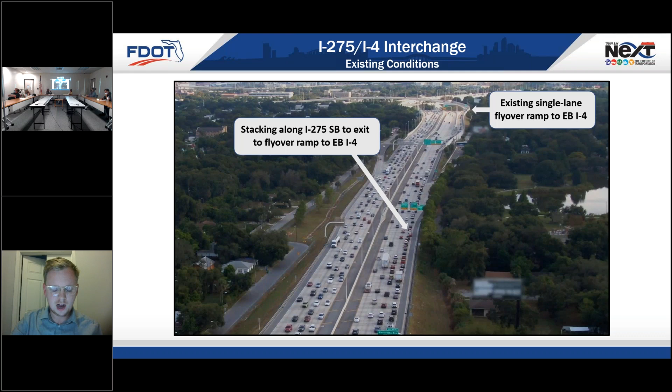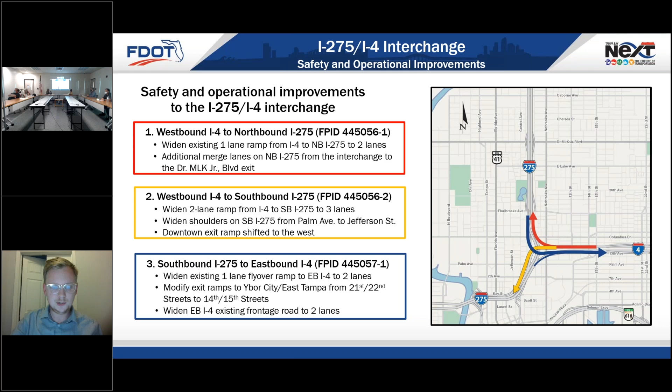There are 3 proposed changes to alleviate these problems: the red being westbound I-4 to northbound I-275, the yellow being westbound I-4 to southbound I-275, and the blue being southbound I-275 to eastbound I-4.

These quick fix safety and operational adjustments will reduce the previously stated lane weaving and speeding, reduce congestion in lining up with the I-4 exit, and improve access to the local exits.

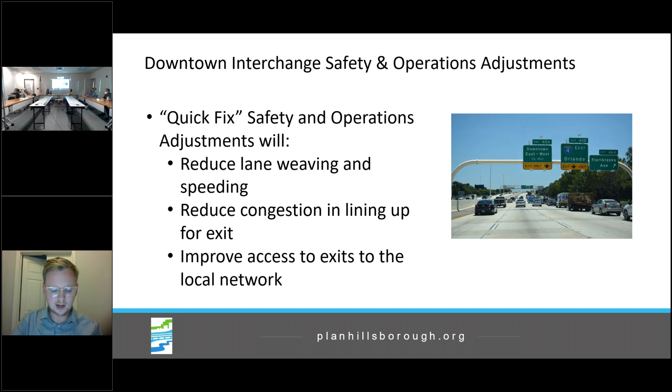FDOT is measuring that the downtown interchange will reduce deaths and serious injuries on I-275 near I-4 by nearly half. This means the downtown interchange could prevent 1 to 2 fatal crashes and roughly 220 injury crashes annually. Since there are roughly 200 fatalities in Hillsborough County annually, this could mean a 1% drop in that measure.

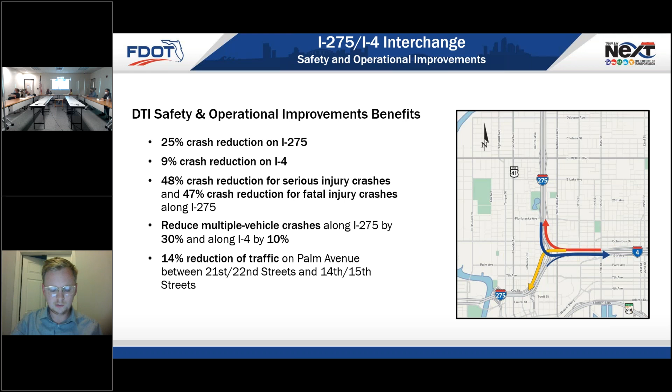FDOT is also measuring a 14% traffic reduction on local streets. Continuing on that topic of traffic congestion on local streets, the downtown interchange is also planned to improve connectivity and safety on the local street network below.

There's a proposed trail system that will connect the Green Spine project to Ybor and Encore development. Further, these improvements will complete streets under the interstate to connect these communities.

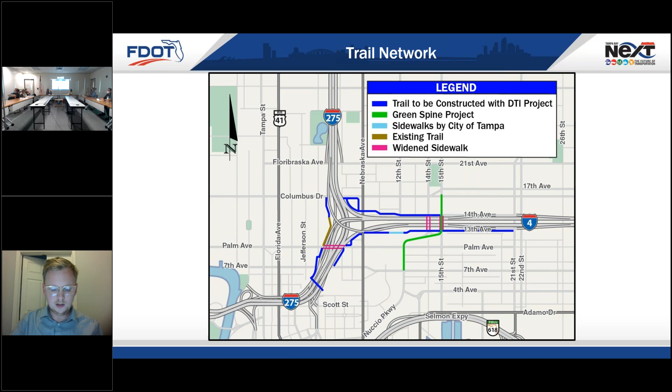The TIP amendments are also intended to relieve some issues on the local network, like drivers driving too fast on and off the interstate ramps, and difficulty seeing at night. Some mitigation strategies include reduced lane widths and high emphasis on crosswalk markings.

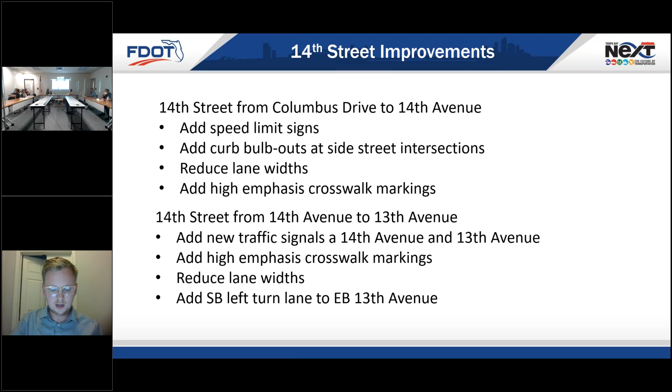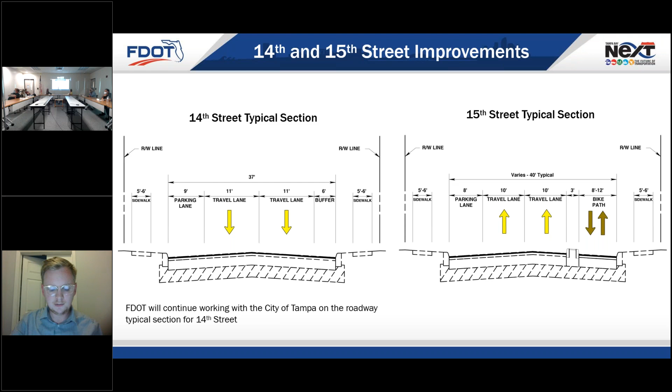This slide shows the typical street sections for 14th and 15th Streets. While FDOT is responsible for the work on 14th Street, the City of Tampa has plans to improve 15th Street through the Green Spine project. These changes include sidewalks moving from 5 to 6 feet and lanes being narrowed.

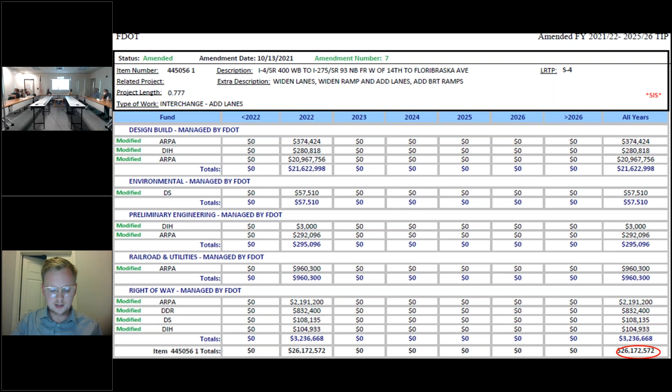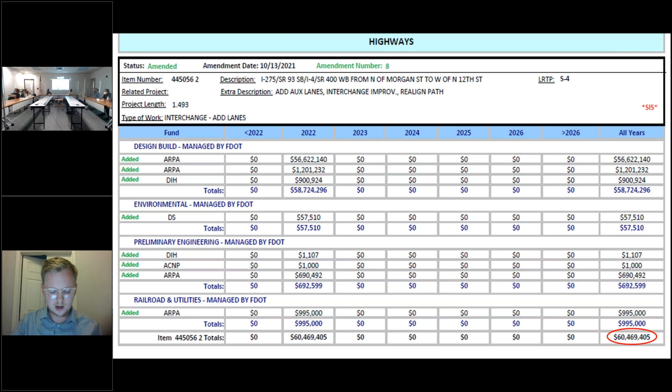The next amendment is an additional 60 million for westbound I-4 to southbound I-275. The third amendment in this set, in the downtown interchange project, is adding 66 million for the I-275 southbound off-ramp to I-4. These 3 amendments make up roughly 154 million.

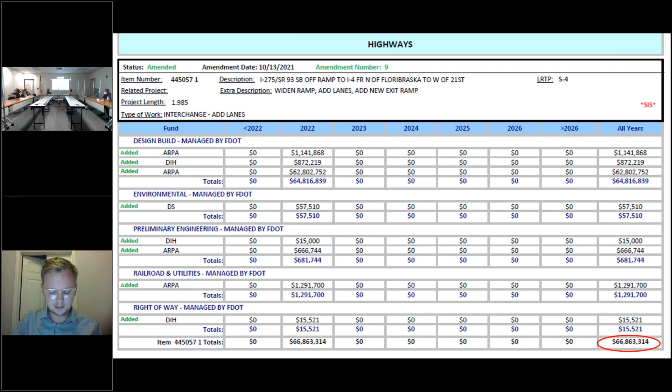The next group of projects is the Westshore Interchange Reconstruction preliminary phase. These 5 projects are preliminary projects that make up 1 out of 4 phases of the Westshore Interchange. The Westshore Interchange has been a top regional priority for many years, and these projects aim to reduce congestion and weaving at the intersection of State Road 60 and I-275. They will also complement the Howard Frankland Bridge reconstruction.

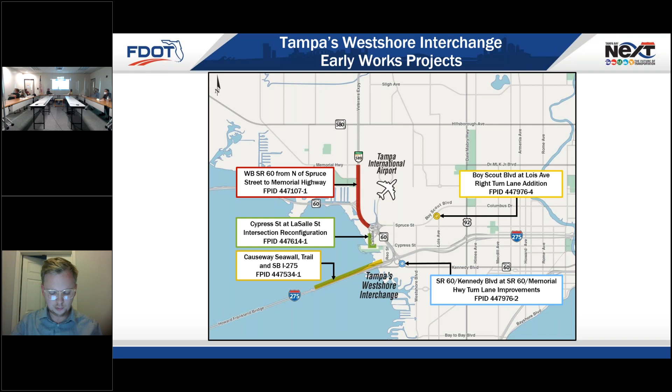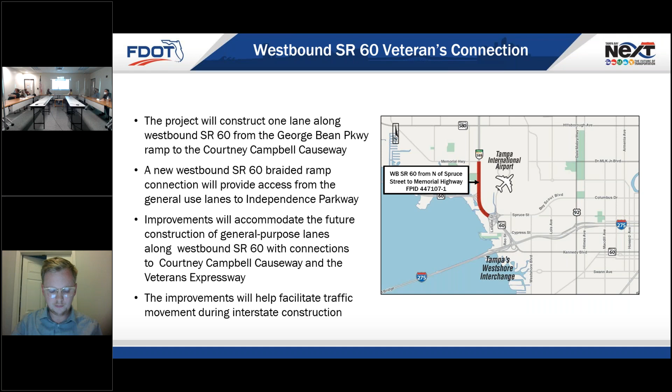The first project, westbound State Road 60, will construct 1 general purpose lane, not a toll lane, along westbound State Road 60 from the George Bean Parkway to Courtney Campbell Causeway. The project has a total of around 36 million for utilities, preliminary engineering, environmental care, and the design build.

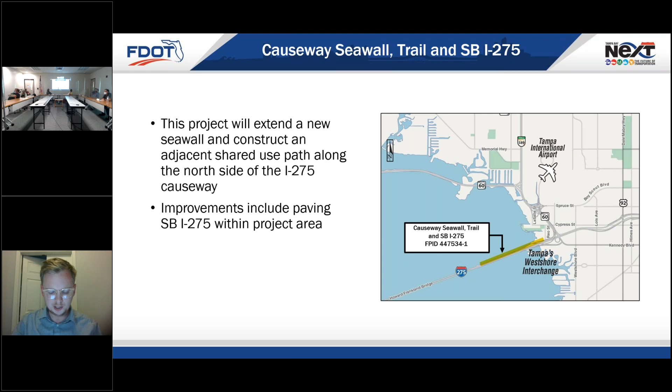The next project will extend a new seawall and construct an adjacent shared use path along the north side of the I-275 causeway. This project has a total of nearly $37 million.

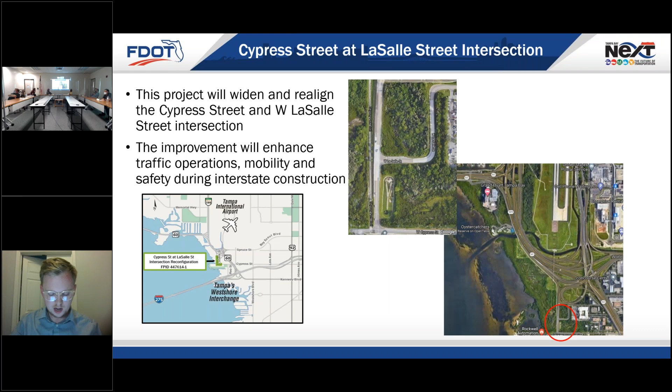The next project is Cypress and LaSalle Street. These 2 low-volume roads are near business parks. They will be widened to enhance connectivity to 2 off-ramps and 1 on-ramp to the West Shore Tampa International Interchange. The project cost is around $3.6 million.

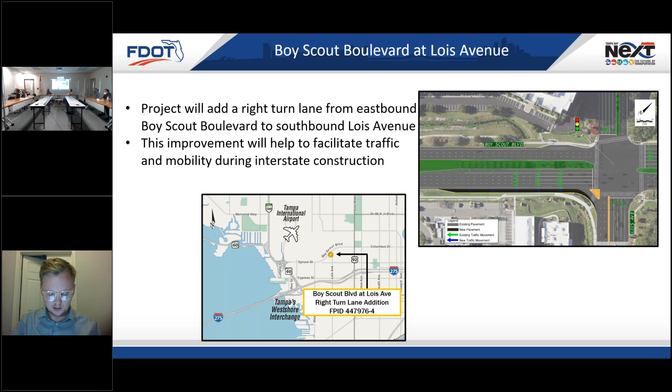The final West Shore Interchange Amendment is a project to add a right turn lane from eastbound Boy Scout Boulevard to southbound Lois Avenue. This project has a total of around $527,000.

Finally, the Integrated Corridor Management, or Traffic Congestion Management technology, will allow a traffic control management center to manage congestion among several key corridors. These corridors include Nebraska Avenue, Tampa Street or Florida Avenue, Hillsborough Avenue, Dr. MLK Jr. Boulevard, Boy Scout Boulevard, and Kennedy Boulevard.

These systems include advanced detection monitoring systems, dynamic message signs, and closed circuit television. They have the goal of making roads safer and improving travel time reliability. Ultimately, they will deploy technology to allow engineers to see what's happening with traffic in real time.

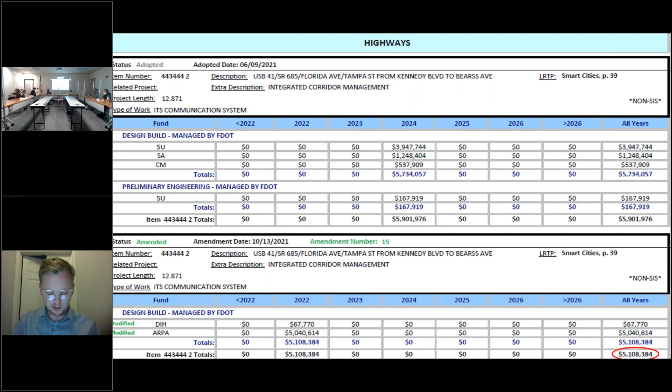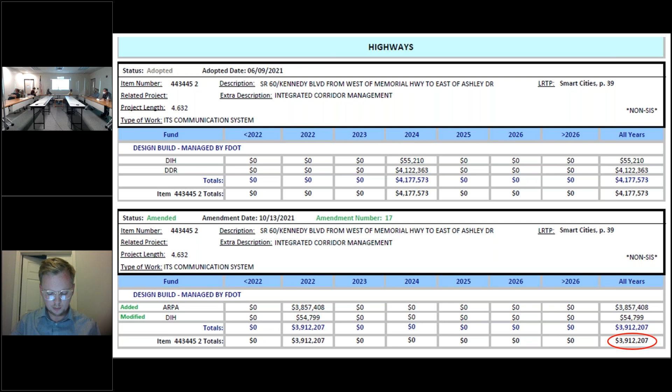The first of these amendments is roughly $5 million for design and build of Florida Avenue or Tampa Street. The next is roughly $6 million for Nebraska Avenue from Kennedy Boulevard to Bears Avenue. The third amendment is to change funds for roughly $4 million for design build of ITS systems on Kennedy Boulevard from West Memorial Highway to Ashley Drive.

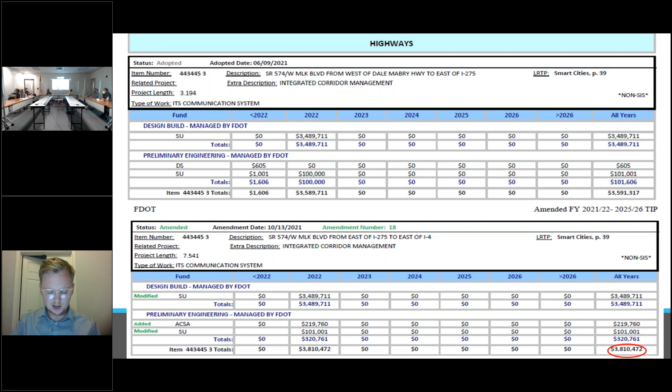The fourth is Amendment 18 for funding, including $3.8 million of ITS systems on Dr. MLK. The fifth is $3.3 million for ITS systems on Hillsborough Avenue. Finally, the sixth ICM project, Amendment number 20, is $1.6 million for ITS systems on Boy Scout Boulevard from Airport Service Road to Dale Mabry Highway.

As part of our public participation pilot, we're aiming to ensure that the public has had the opportunity to voice their concerns and support before they come before the committees and board.

One of our outreach projects came from the Long Range Transportation Plan Outreach Survey that received over 5,200 responses. Respondents were given 4 options regarding a downtown interchange reconstruction. While the no-build score was higher in downtown areas and the full rebuild rating was higher in ex-urban areas, the safety and traffic quick fix option had the highest star rating overall and was supported or unopposed by most zip codes.

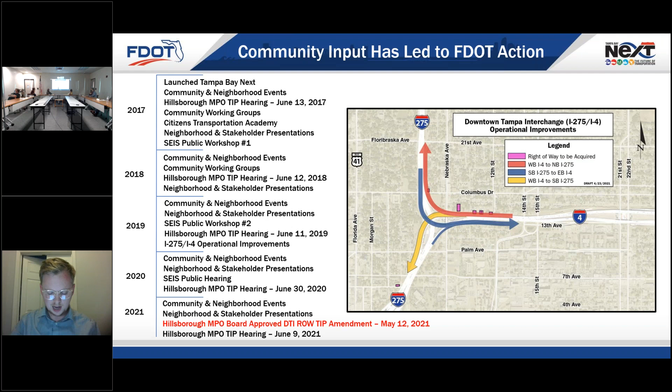As part of the pilot, we also asked jurisdictions what public outreach they have done. FDOT in this case has done significant outreach regarding the downtown interchange since 2017.

This has involved a series of community and neighborhood events, community working groups, and neighborhood and stakeholder presentations. As part of the pilot outreach, the TPO has also done significant outreach for these projects, including a press release to 30 media outlets and more than 100 neighborhood associations and community groups. There's also social media outreach, signs posted, and a webpage for more information.

There have been some clerical corrections since the beginning of these presentations. This involved the description of the first West Shore Interchange project changing from 1 express lane to 1 general purpose lane. There are no toll lanes in these amendments. These changes have also included a correction from left to right turn lane from eastbound Kennedy to eastbound Kennedy. Finally, the project limits for the Hillsborough Avenue ICM project has changed from I-275 to Veterans Expressway.

This slide shows the TAC and CAC suggestions. These include leading pedestrian intervals at intersections with additional turn lanes, accommodating cyclists riding to Cypress Point Park and Courtney Campbell Causeway, noise walls at Robles Park, landscaping at those noise walls, and narrow lanes and wider sidewalks on 14th Street.

In coordination with the City of Tampa, traffic signal prioritization for buses on the ICM corridors with coordination with HART, to ensure that new fences do not impede walk and bike access opportunities, and to refer to the downtown interchange as part of the high injury network rather than as a Vision Zero corridor.

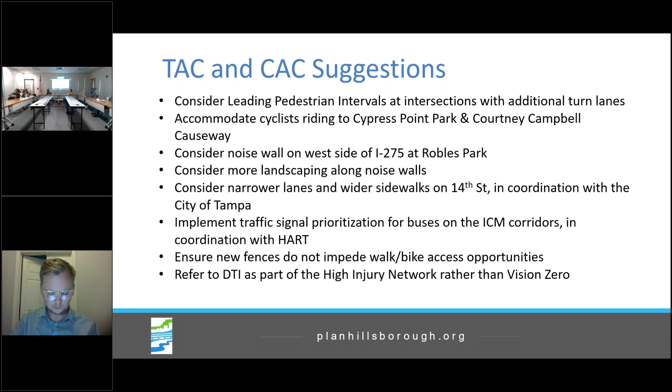I'd also like to provide Mary Lou Godfrey's information from FDOT. She's a project manager for the Tampa Bay Next project, along with my contact information as well. Today, the TPO board voted to approve the amendments.

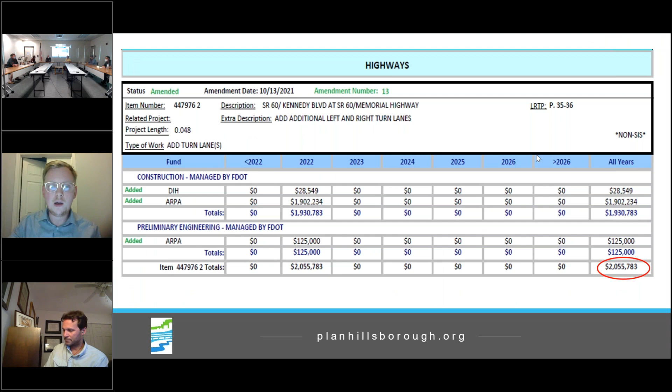I do have Mary Lou Godfrey on the line. She may be able to answer that question better than I, but I'll go back to the slide. The proposed changes are a third right turn lane from Kennedy to Kennedy, and a left turn lane from Kennedy to Kennedy. The TPO did make a motion to include recommendations from the TAC and CAC, which include leading pedestrian intervals at intersections with additional turn lanes. However, I'll refer to Mary Lou Godfrey to see if she has anything to add.

Yes, these plans are currently in design, and those pedestrian and bicycle accommodations are being reviewed. So we are still in the design process, but we can provide you updated plans if you would like, for better clarification of the pedestrian and bicyclist accommodations.

Yeah, because I believe Kennedy Boulevard has transit stops. It's a transit corridor, is that correct? And so you're going to have pedestrian activity there. Is there pedestrian refuges being considered, or mid-block crosswalks? Also, is this part of the alignment of the bicycle network?

So is there, based on the land uses, destinations that micromobility users are currently accessing and want to continue to access, even though we're making the intersection larger with more left turn lanes that create larger crossing distances? That's the kind of information I'd be interested in.

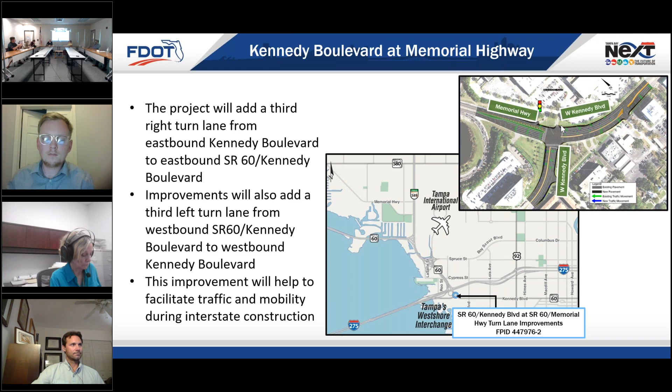Go ahead, Miranda. So that the signal, you don't have to wait so long, or I'm just trying to understand.

Well, because there's typically loops in the road that detect the cars, but the industry is moving towards cameras and infrared, which will be able to detect pedestrians and bicyclists as well, to allow them to commute and travel efficiently by being recognized by the traffic signal.

Will the technology be upgraded at this location, and will it detect pedestrians and bikes? Like I said, we're currently in the design, but we'll certainly incorporate the pedestrian detection. I don't know the exact amount of technology that we currently aren't using that would be added, but I could certainly find out for you.

Now, for that ITS, does that include on and off ramps that you guys will be improving? It's currently on what we consider our arterials, so it's not included on the on and off ramps at this time.

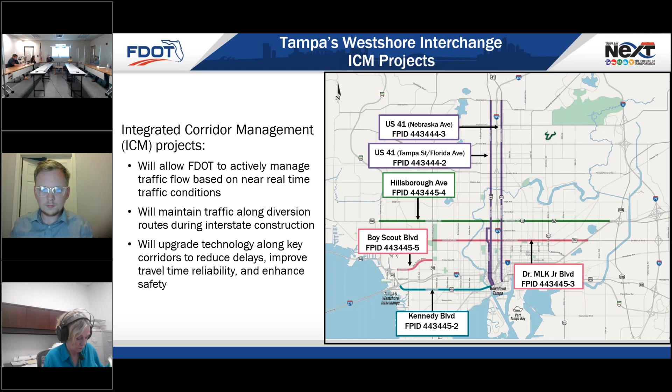Okay, so arterials. So how will this ITS improve walking and biking efficiency and safety? Currently, the integrated corridor management looks mostly at, it does have the ability to see the density of traffic, so that it can be gauged on which routes people can take if there seems to be congestion.

So, in an indirect way, that could help pedestrians not to have roads that have extensive volumes on them, just disperse the traffic, reduce the delays, increase safety.

Okay, because that travel time, is that like delivered to your Google Maps and your Waze and? Yes, through those data platforms, yes.

So then a pedestrian who wants a walking route would also get delay time, is that right? Like red time versus, or is it just, yeah, with that system, also provide them with red and green and walking routes instead of a time based on their walking rate.

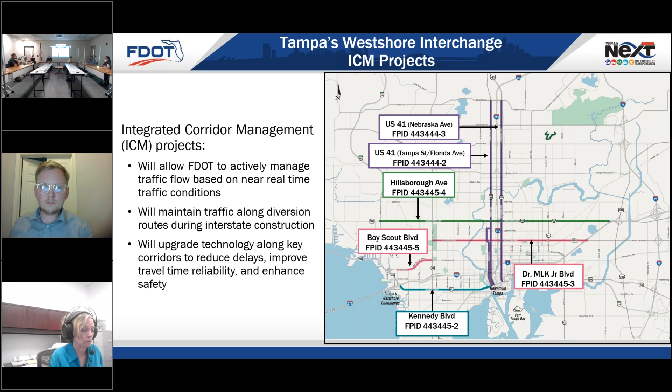I'm not sure, I could find out for you. Are you asking for specific technology to be incorporated? Because typically they would just do a standard crosswalk, add LPI, and make sure it's all at the standard and everything.

But are you guys? Yeah, because this technology is providing travel times to drivers, right? When they look up directions and stuff and. Well, there will be like a crosswalk button, so when you hit the button, then it'll flip the signal and it'll give you the walk sign.

But so my understanding is when these drivers are traveling, they're provided with reliable travel times. Is that right, Barry? Yes, and it feeds it to many of the applications like Waze, or if perhaps there's some kind of issue or incident on one of the arterials, it may recommend a different route.

And we do have, if it so happens maybe there's an incident on the interstate, and based on the data that's from the integrated corridor, it's determined that there's an alternate route. Sometimes that can be used to allow drivers to improve their travel time.

If I may, is the question, Abigail, is this technology going to be transferable to any pedestrian or bicyclist use of tracking, mapping, or route direction kind of applications? I think that's the question in the comments.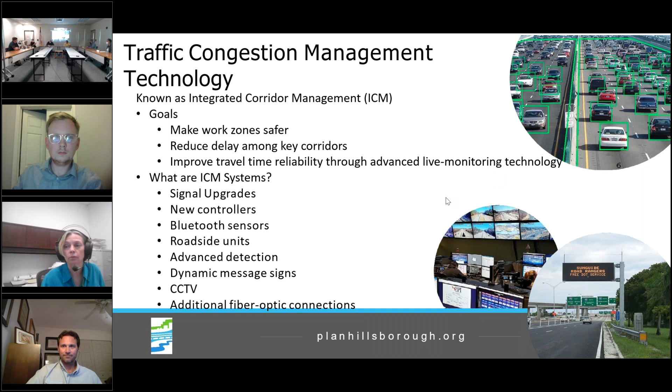I talked about, okay, we want to make a shared use path connection from the project up to Cypress Point Park, and Mary Lou said that they're going to be doing that through Rio Street, an 11-foot shared use path running adjacent to Rio Street. And then also, I think the other area of opportunity is making the connection from Rio to the West Shore Interchange Mall, as that's a big regional destination. I think that shared use path connection should be made there.

But I know that this project, as it currently stands, does not have that shared use path connection. And considering that they're going to be doing some heavy construction on Kennedy and State Road 60, my motion is that we recommend the addition of a shared use path connection between Rio Street and State Road 60 to the West Shore Mall.

What do you guys think of that? I would second that. You would second that?

Okay, so we have a motion and a second, so it's time for commentary. So the motion again, Tim, is to recommend a shared use path along Rio Street, along Kennedy Boulevard, connecting the existing shared use path that will be present at Rio Street to the West Shore Mall, ideally along the north side of Kennedy Boulevard, but obviously where the right of way permits.

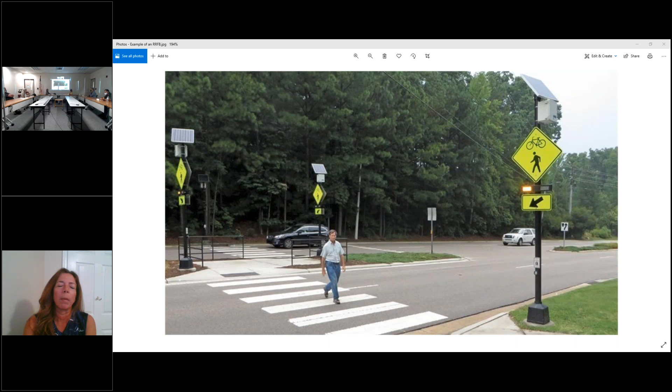So there's regional support, and that was shown in the attached letter to your item, but it was from the Suncoast Transportation Planning Alliance, which used to be TBARTA. There's 5 MPO and TPOs on that group, as well as several cities, and even the Institute of Transportation Engineers have signed on in their opposition to these laws, the 2 bills, I should say. And we just like to get support from our committees.

We also will be sending a letter very similar to this letter to our legislative delegation and have that distributed out, and really are encouraging other agencies and organizations to chime in, because I guess we've heard from some legislators that if you inundate them with letters, it kind of gets their attention. So that's it. I can maybe answer some questions. Abigail's there if there's some technical questions, but just wanted to hear your thoughts on that letter.

And I'll open up the floor concerning any questions. Yes, Val. Is that what's on Bay Shore now? There's several of them on Bay Shore now, which has helped with safety on Bay Shore Boulevard. That's Bay Shore Boulevard has them, East Hillsborough Avenue, Fletcher Avenue. You go back to.

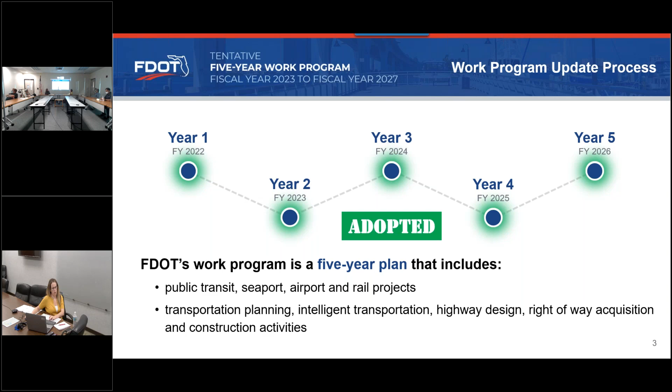So each year on June 30th, the current year of the work program ends. And on July 1st, year 2 moves up to be the new current year.

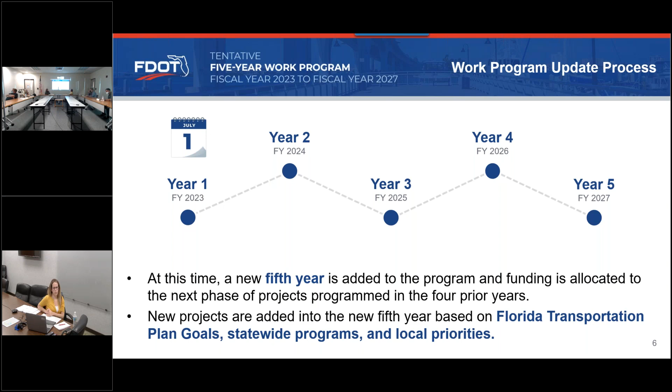This is just showing that come July 2022, we're going to be in fiscal year 23, and our new 5-year program is going to extend all the way into 2027. So new projects discussed tonight are going to be any projects that have been added to the new 5th year, fiscal year 2027. These projects are based on Florida Transportation Plan goals, statewide programs, and local priorities.

Currently, we are in the process of updating the work program, so we're in the tentative stage. It's really a proposed work program at this point. We are going to submit it to the Florida legislature later this year for review, and then it goes to the governor for review and signature. After the governor signs the work program and is good with everything, the first year will be included in the state budget, and the work program is considered adopted at that time.

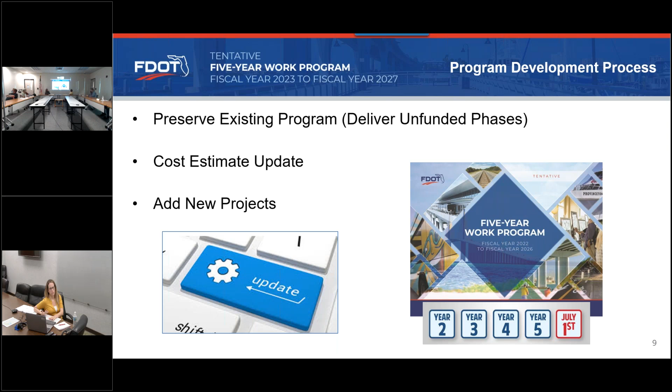Basically, when we're deciding what projects are going to be funded, we first look to preserve existing programs. So we look to see if we have any projects with phases that are not currently funded first. Then we look at the cost estimates of projects that are currently funded, so any estimates that need to be updated, we program and fund those. And then we look at adding new projects in the new 5th year. Sorry, confusing.

Projects that we would look to fund would be safety and security. We want to preserve the system, multimodal enhancements, operational improvements, capacity improvements. All of these projects are based on the MPO's priority list, regional priorities, the SIS, and FDOT priorities as well.

So basically, in my presentation, if you don't hear me bring up a project, it's nothing new, it's still programmed, nothing has changed. Generally speaking, everything I'm about to give you the highlights for Hillsborough County is basically anything that's been added to fiscal year 2027, and it could be anything from PD&E phase, design, right-of-way, construction, design build, or capital grant.

So the first project is the MPO transportation planning, which is the #1 priority for the TPO. They get this every year. We've added their planning studies to do whatever planning studies they need to perform in fiscal year 2027.

The second one is George Road from Dana Shores to Town and Country Greenway. It looks like we had it programmed for design in fiscal year 24. However, we went ahead and added a planning study, a corridor study, in fiscal year 2025 at the request of the MPO. And the last one on this particular slide is Fowler Avenue from 56 to I-75. We added a corridor study in fiscal year 23 to really look at the bike-ped improvements that need to be done in this part of the corridor.

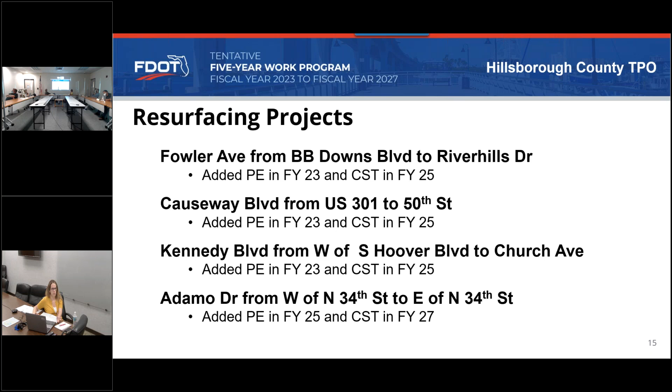This one looks a little different, so let me hold on one second. The department actually funds resurfacing projects in the new third year of the work program, so that's why some of the funding isn't showing in 27 — it's actually a bit further in. So that works for everybody.

The last set of resurfacing projects actually include intersection improvements, so we put them all on one slide. All of these projects are being funded for design in fiscal year 23, with construction in 25. The first is State Road 60 from Buckingham Place to Lithia Pinecrest Road. The next is North Park Road from Baker Street to I-4. And the last is Dale Mabry Highway from Gandy Boulevard to Sevilla Street.

The next slide covers upcoming rail projects that were added. We added rail safety construction in fiscal year 23 for State Road 60 rail crossing 624572-B, east of Clarence Gordon Drive or Junior Road. We've also advanced rail safety construction from fiscal year 25 to 23 for the Kennedy Boulevard at Willow Avenue Railroad Crossing.

Our last set of slides on Hillsborough County highlights is on multimodal projects. TIA is getting construction in fiscal year 23 for the replacement of their airside shuttle cars and systems. Then HART bus replacements, another TPO priority — I think it's number 3 — they receive funding every year, usually in the form of a capital grant for bus replacements, and they'll be receiving that funding in fiscal year 27.

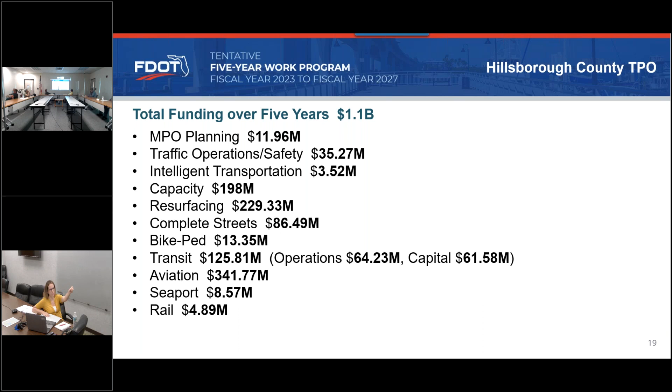The 13 million you're seeing is only the specific bike ped projects coded strictly for bike ped in our work program. However, we take bike ped very seriously — in our complete streets elements, we're adding bike ped components to each project, so there's no way for me to pull that money and capture the correct total amount under each category. If anyone has questions on that, I can try to get you answers. But I did want to point out we are spending more than $13 million on bike ped improvements throughout the district.

This slide lets you know we're doing our online public hearing from October 25th through October 29th, with the website located next to it. Also, on October 28th, we're having our District 7 work program open house in the office, from 9 a.m. to 6. November 12th is when public comments are due, and November 22nd is when MPO objections are due. Later, in winter/spring of 22, this will be reviewed by FDOT and the legislature, and the program will be adopted July 1st, 2022.

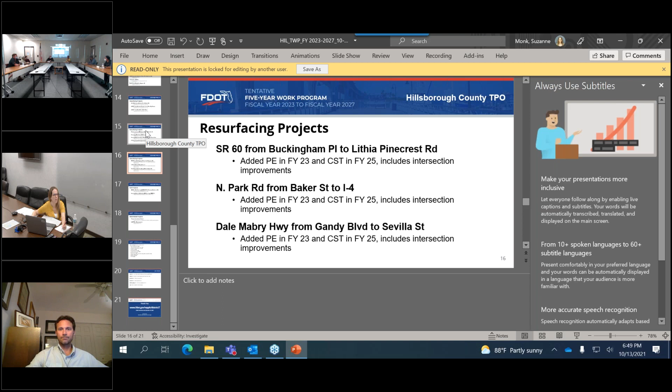No, South Hoover to Church Ave. Kennedy Boulevard? Yeah, that's the one. You're asking if we're going to be doing any bike lanes there? Yeah, okay.

Honestly, I really don't know off the top of my head, but I'm happy to get that information and reach out to the project manager on that project and see. The way they code it in the work program, it just says resurfacing, but hold on, let me see.

The westernmost part of that would be part of what Mr. Horst made the motion for, adding a side path from Rio to, I guess, Kennedy where it hits again. But Church would be, of course, between there all the way down to Dale Mabry almost. The problem is that you've got a cemetery there, and between Church and Dale Mabry, it really closes off a lot of options.

I'm looking it up right now to see exactly what the scope is, to see if they're doing anything besides that. But if not, then I can definitely get with somebody at the district to see what we can do. And I recall when that came before this committee, probably about a year ago, there was a request for an additional mid-block crossing between Lois and West Shore in that stretch, if I'm not mistaken. But we can get that information to you. Okay, yeah, I'm just trying to open the PPR to see exactly. I'm kind of the Lone Ranger here today, so I apologize.

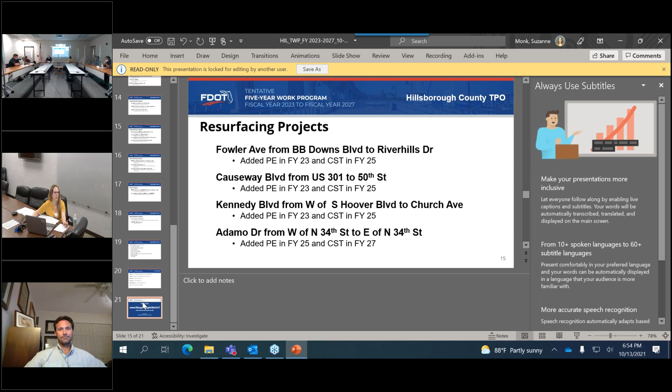Okay, yeah, I mean, I can pass along the message. I would suggest making that comment on the website. Just because we are going to be in design for 23, right now is the time to be making those comments. So I will pass the comment along, but I also suggest if you guys have any comments on any of the projects, take the time to go to the website and make the comments, because that's what it's there for.

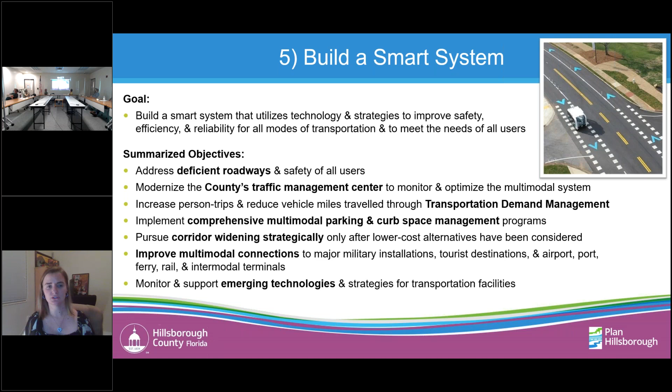And finally, monitoring and supporting emerging technologies and strategies for transportation facilities. As I mentioned in the beginning, this can include everything from e-bikes and scooters to connected vehicles and even autonomous vehicles.

We also have an objective to minimize adverse impacts to residential and commercial neighborhoods, as well as environmentally sensitive land. Protecting neighborhoods from adverse impact of through traffic and speeds while providing reasonable access to and from those areas. And finally, constructing complete streets to achieve safety, comfort, and aesthetics for all expected users and modes.

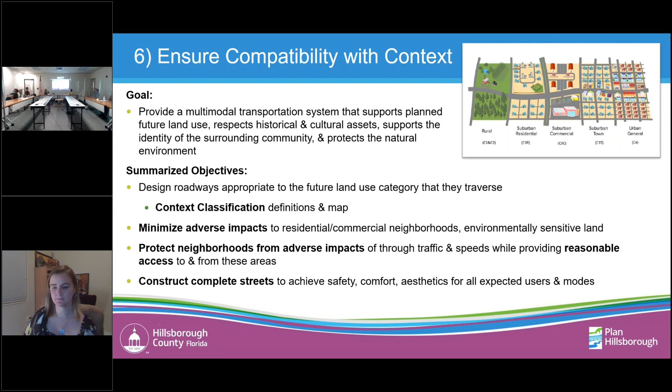Again, as I mentioned in the beginning, we do have an implementation and monitoring section that will be updated as guidance documents and standards become available. Currently, we are in the July cycle of plan amendments with the mobility section. These other documents are in progress with the county, including the Complete Streets Guidebook, the Transportation Design Manual, the Transportation Technical Manual, and an update to the Corridor Preservation Plan.

We do have a mobility section project page where you can review the draft language. You can see what's new and existing and compare the existing adopted language with the proposed. That's via what we call crosswalks, which are under supporting documents at the very bottom of the page. They're very useful to see how we modified the various language. You can review previous presentations as well as other background information.

I will note here that our public comment period ends this Friday. So please, if you have any comments on the mobility section that you would like to submit online, please note that date. I would also note that if you have any positive things to say about the mobility section, we will definitely be taking those as well. And that will be all included within our packets to both the Planning Commission and the BOCC.